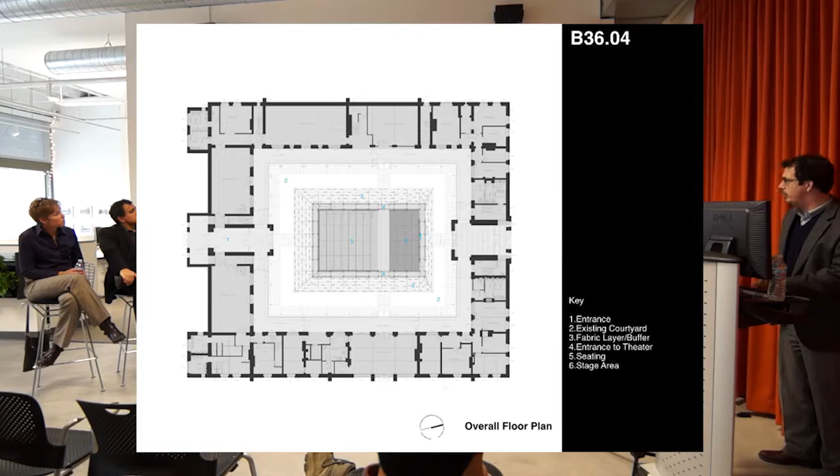We were given a design competition with a very tight, small courtyard. It's historic, very old, used to be a stable for the castle next door, so you can kind of see the plan. This is the building, obviously, and this is the courtyard is what we're dealing with.

Originally, we thought about the courtyard and how we could create interesting objects, but then quickly we realized that we just don't have any space. So very quickly we realized that the real problem is to create a somewhat tolerable transition between the existing building, the structure, and the theater itself.

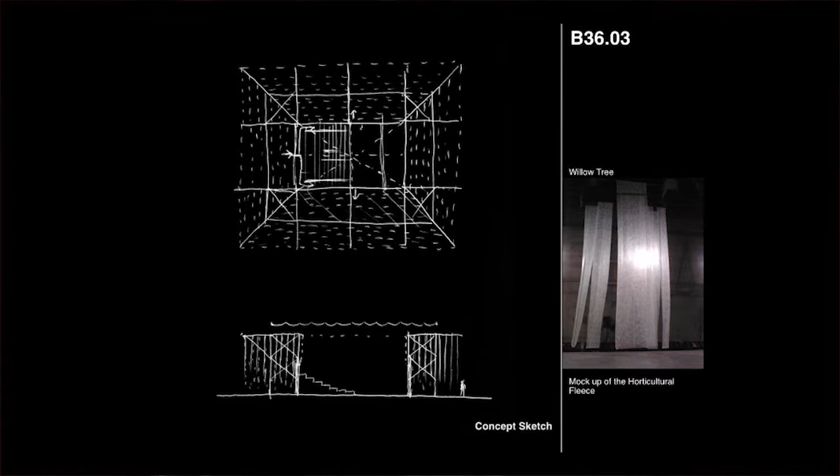So that's really a very simple diagram. If you go back to the sketch, you'll see this one, which is really what started the whole idea of having this kind of very soft transition from the courtyard into the theater, to create a very interesting transition.

The horticultural fleece is funny because one of the collaborators on this project, a professor in the theater department at Ohio State, had used that fabric on a stage set design. He wanted to use it as a recyclable material, one that's incredibly light, incredibly inexpensive, and you can do a lot of things with it. So we just took it and ran with it. It's almost like a happy coincidence that the things kind of appear to be what they look like.

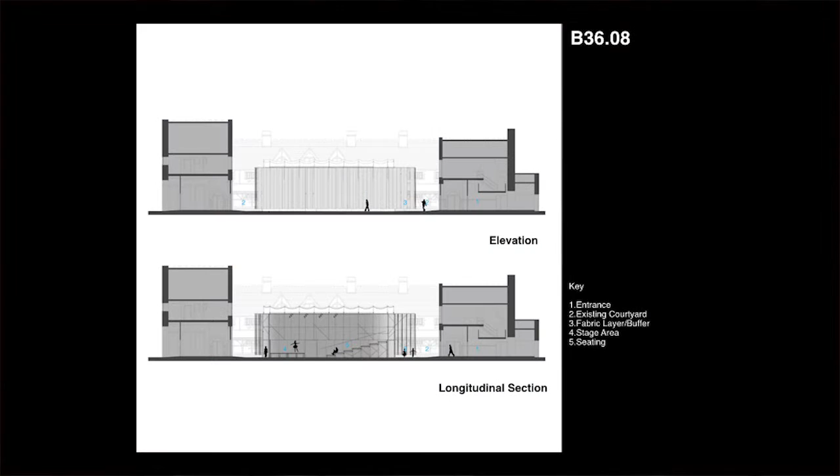So I guess I'm running out of time. You actually have 1 more minute.

One of the surprises of this project is really how much movement those fabrics create. When I was there, the whole thing felt almost like this underwater movement. Originally I thought it was very subtle, so we called it the willow theater, but in reality it's more like a jellyfish—the way the fabric moved in the wind. It took us about 2 hours just to unwrap everything before we photographed the structure. It was taking forever. So that was the surprise with that material.

Very good. I'd like to move down the line to Joe with the Battelle Darby Creek project. I'm going to advance the slides so we can get those coordinated.

The Battelle Darby Creek Nature Center was really the hub of a 7,000 acre Metro Park that Metro Parks has been continuously acquiring and trying to restore as prairie, but it lacked a center of activity for the school groups and other visitors coming in every day. We had this absolutely beautiful site to work with—restored prairie on what used to be farmland, now being turned back into the prairie ecology that had been there before.

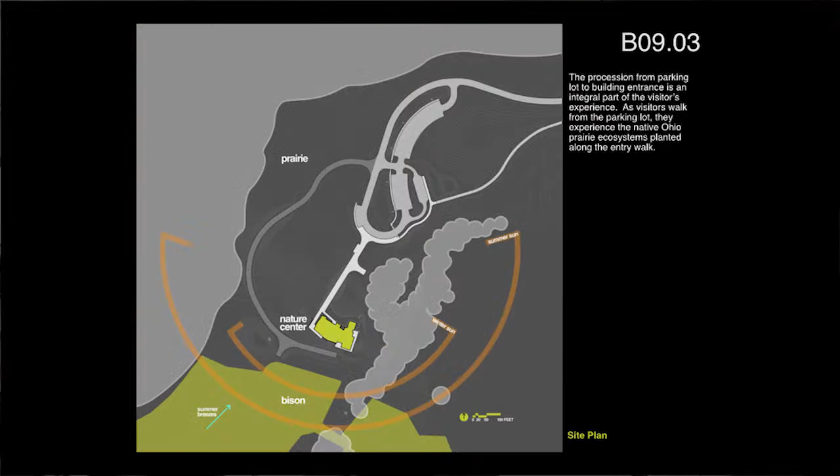A really crucial thing with this project was wanting to bring people into that prairie landscape first, having their impression of the site be dominated by the prairie before they ever reached the building. That led to creating a very long procession from the parking to the building, framing the landscape at the end of that procession rather than ending at a monumental front door. So there's a monumental frame and a monumental porch, but not a monumental front door.

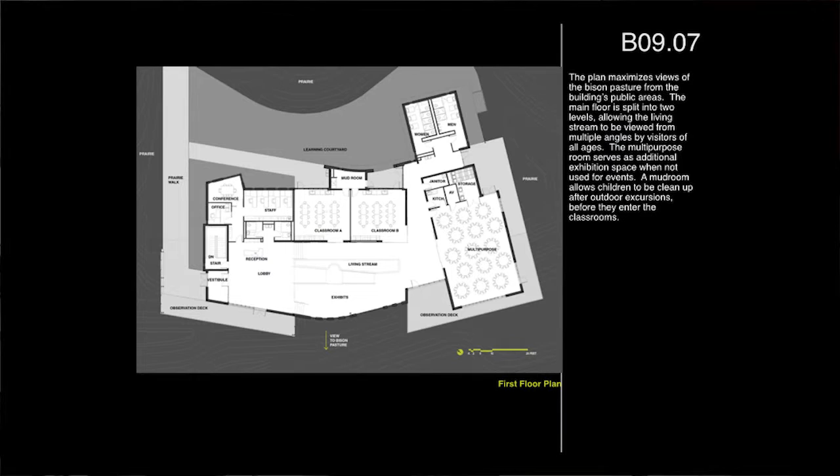The plan was generated through careful study of the topography, trying to balance lowering the building enough that as you approach it disappears, but keeping it high enough that you still get the nice view on the south side, and also keeping it out of the very strict boundaries that are part of the Darby Watershed Accord—really strict setbacks for the creeks around there.

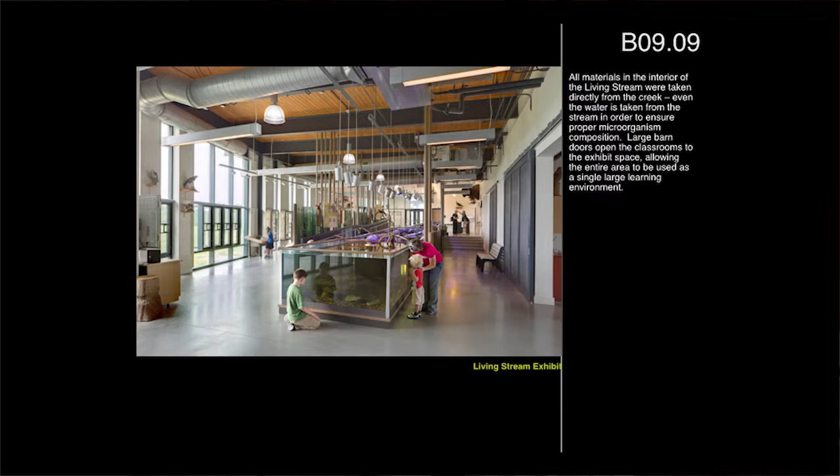Inside, there are a lot of exhibition spaces. This is the primary exhibition space, next to what's called the Living Stream—it mimics the riparian habitat in Darby Creek itself. Everything in the stream was brought from the creek, including the water. There's a pump that can bring new creek water up because it has the right biology for the organisms inside.

The material palette was inspired by the vernacular in the area—the barns and that kind of thing. We didn't want the building to look like a barn at all, but the corrugated siding and the wood roof deck were taken from that local imagery.

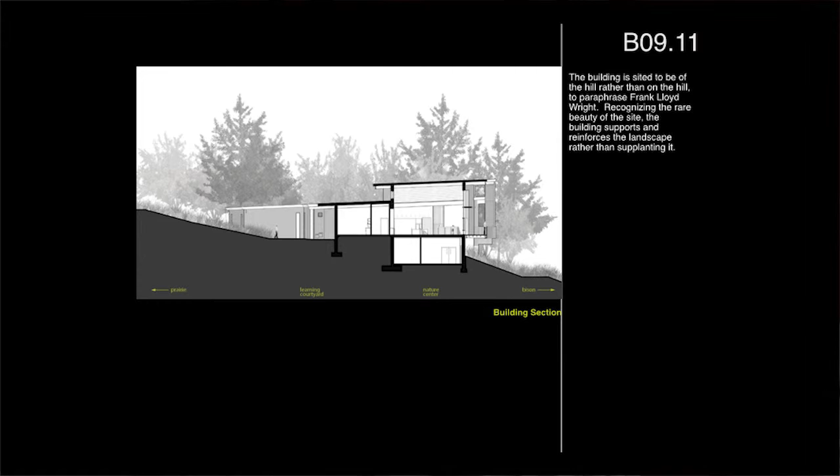This section through the hill was part of the inspiration for the whole project—the building coming out of the hill, being of the hill rather than perched on top of it. The next photo shows what we wanted to achieve, pushing it over the edge of the hill a bit more to get that effect.

You don't really understand the true size of the building until you get around to the south side, especially if you go one more slide.

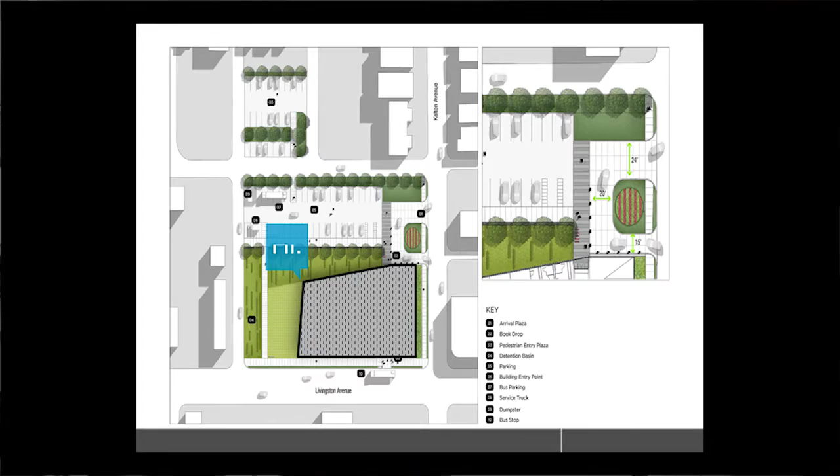The site strategy was pretty simple in terms of siting it. It's technical, but we were in an urban commercial overlay, so the buildings had to be pushed toward the street with parking at the rear. We wanted to capitalize on the corner of Livingston and Kelton for prominence and visibility. So, next slide.

There's also a story about what libraries are doing right now. A lot of people, at the outset of the project, asked whether there's a need for books anymore and what libraries do in the community. I think what we tried to understand is what libraries traditionally represented — this place where you went to get knowledge. What we're realizing now is that libraries are a lot more than just a place to get resources; it's really a place for social exchange.

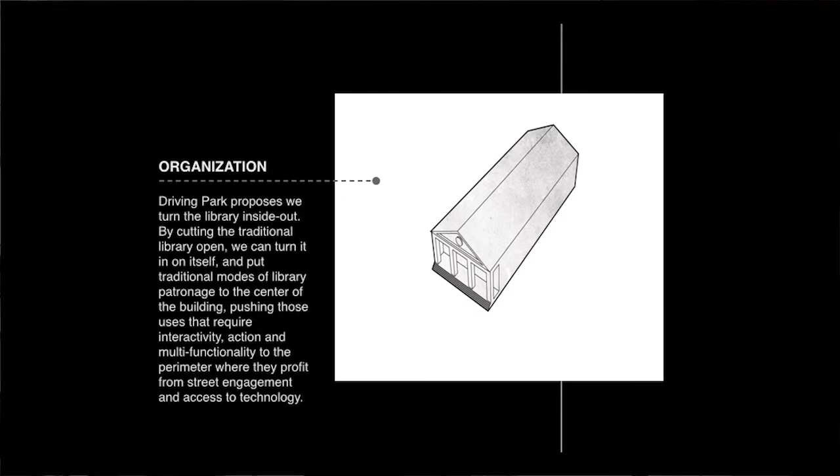How that compares to a traditional library was really important to the way we thought about the project. So we started to understand how the library could be split, turned inside out — a simple idea, but taking one of their key components, flexibility, and figuring out how the library wants to change over time, and how to make that evident in the building.

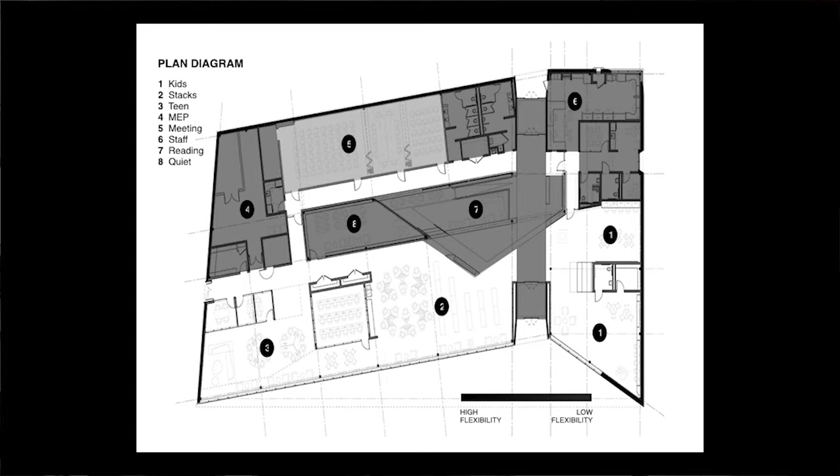We took all the stuff that's typically at the center and put it toward the outside, where it benefited from natural light and exposure to the street and interaction with the outside. As this laid out, the stuff toward the south — north is up — is the more flexible, highly active space, and the stuff to the north is the more utilitarian staff space, which is highly structured. This diagram illustrates that.

We wanted the outside of the project to express a posture reflecting the progressive nature of libraries and how it speaks to its environment. We wanted to use a material palette that was somewhat raw — everything's on a budget, so how does the exterior respond differently, using materials that come together in a different way? We set out the glass, wrapped it in what's traditionally decking material, and created apertures throughout the building with framed views, for entry or for specific moments in the project.

The interior is based on, for those that don't know, Driving Park, actually named after an actual racetrack that was built down the street a while ago. So this area was built around the racetrack, and we wanted to somehow pay homage to that in the interior of the building.

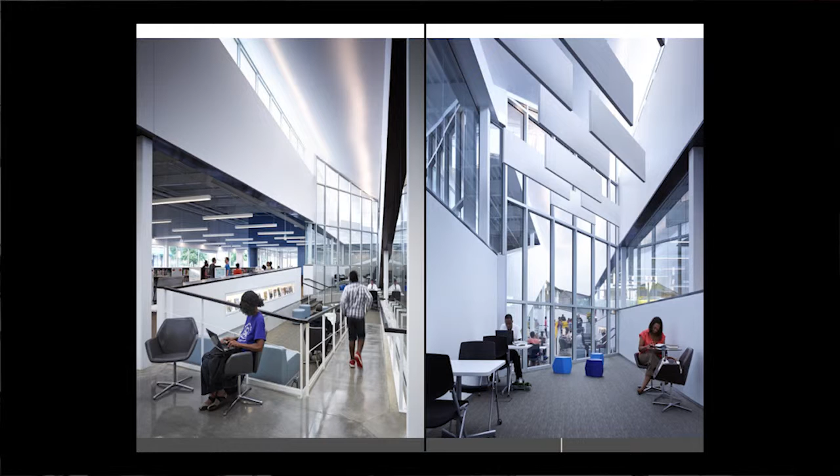So there's this organizational element on the inside that is called a racetrack, and we're using it in a way that helps to organize space, bring natural light into the building, and also house some of the media and assets of the library. So it has this kind of performative nature to it.

And so really all the spaces are built around kind of identifying these objects, that racetrack, and we're letting the furniture and the stuff that changes over time—we kept the palette neutral as far as interior materials go, and we have the furniture be the stuff that's easily changed. We let that be a little bit more vibrant.

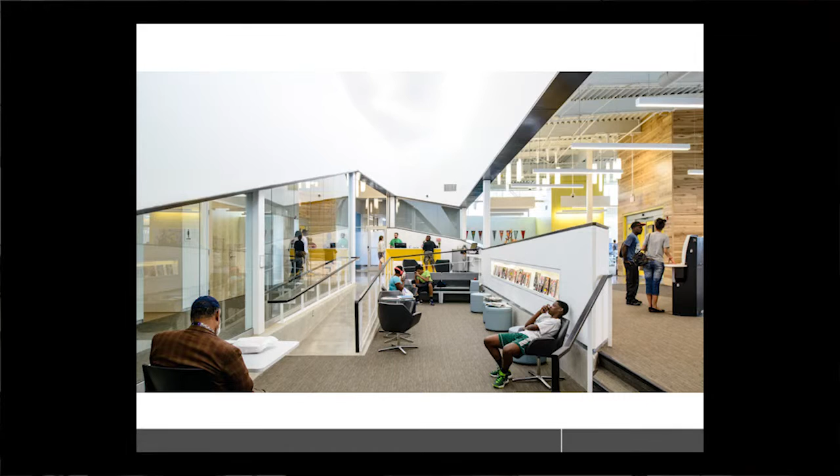Jack, if you could introduce your project, which is also a library for Kenton County.

Okay, let me go a few pages here. We'll get to this library. This is in Covington, Kentucky, which if you've ever been there, most of the urban fabric is still there, which is really nice in this community. And the library—actually this existing library was built in the 70s, but it's in the center of the historic district.

You can kind of see the existing here. It's a building with really small slit windows.

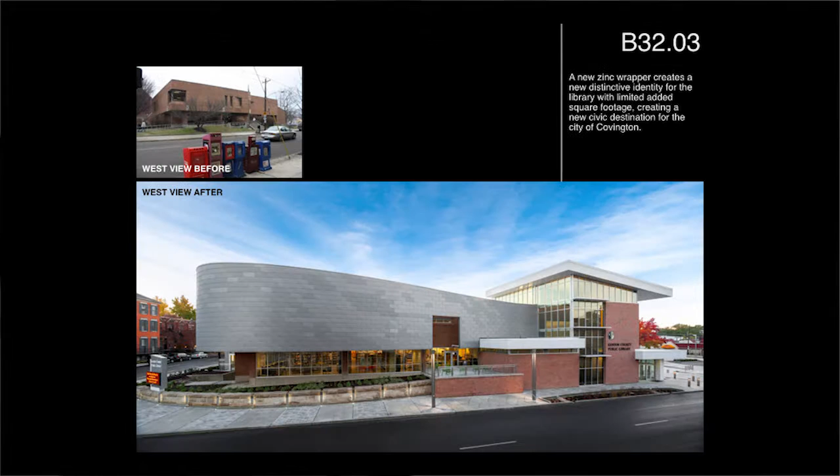The issue with that was the owner really wanted a project that became a destination in Covington. And on the same street, if you've ever been to Covington, right down the river, is the big Ascent, the big tower. So this is on the same street, about 3 blocks away, and they wanted something that would draw the attention to this building.

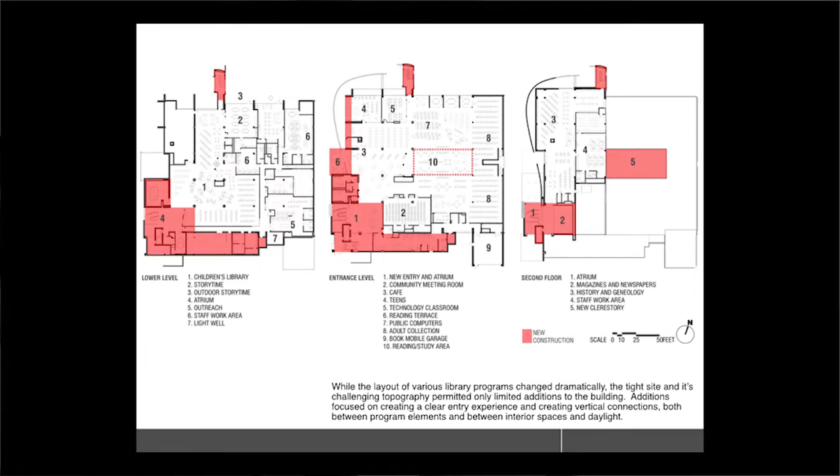So you can see kind of what was done here with the program—to take a 52,000 square foot building and make it 65,000 square feet. And what we did was, the idea was to wrap the building, change the function completely. We had to reorient the entrance to a different side of the building functionally. So the additions were placed really to meet the function of the library and to change the image completely for the library.

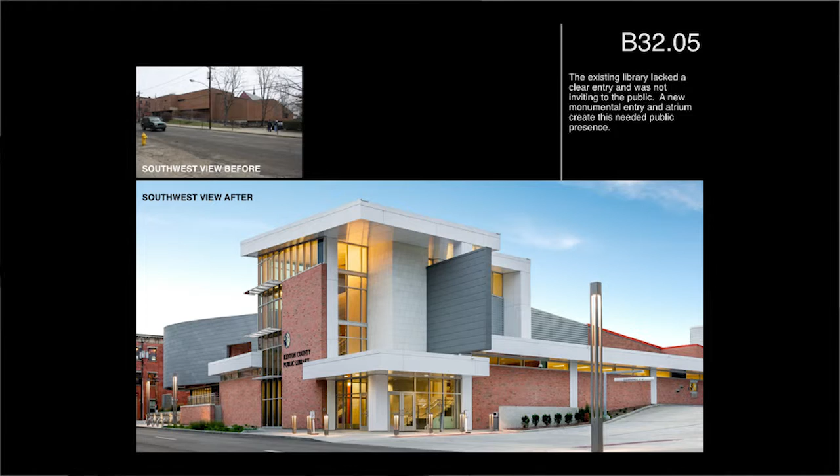Well, let me just explain too—the building was 3 stories, and we reoriented the building and created a new atrium space that actually organized those 3 levels.

With that, the idea with the screen here was, as you enter the site, you can only enter from one corner since it's 2 one-way streets, and this is the corner over here that you see. We reoriented the entrance to the other side, so we had to bring something to draw your eye down to the new entrance. So this screen here flows and draws your eye.

And this is a 3-story entrance. The other issue was that the main level was 7 feet above grade, and how the existing building had a big ramp and those kind of things—this new atrium solves that issue by coming in at a half level with an elevator that went up half a level to the main entrance.

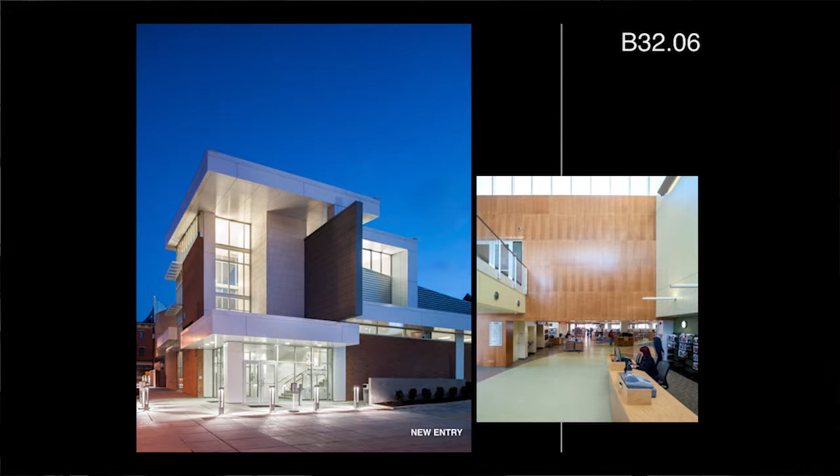The other issue, it seems a little strange, but a big driving factor with this function was it had to have a drive-up window for book pickup and return, and that has to be in the circulation workroom, which also has to have a relationship with the front door. You can see here it ramps up there, and we were able to put a ramp in that gets you right to that same spot. So functionally, all those functions came together.

As part of that, you can see the 3-story atrium that really links the levels. One of the other big issues with the building was creating outdoor space in this urban environment. Those images are at the end—yeah, okay, well they stay there.

The other issue was that we needed to bring light into this building, and we took one of the center bays and just popped it up to give—we made sure it was south and north light for sustainability. So we used daylighting and screened the sun in the summertime from the south side, creating a daylit space which really opened up the building.

You can see the shelving was all on wheels. This did have a very big book collection we had to keep, so it can be changed around and moved around, all the shelving.

You see sectionally here how the new 3-story atrium linked all the levels, and then the clerestory that popped up in the middle.

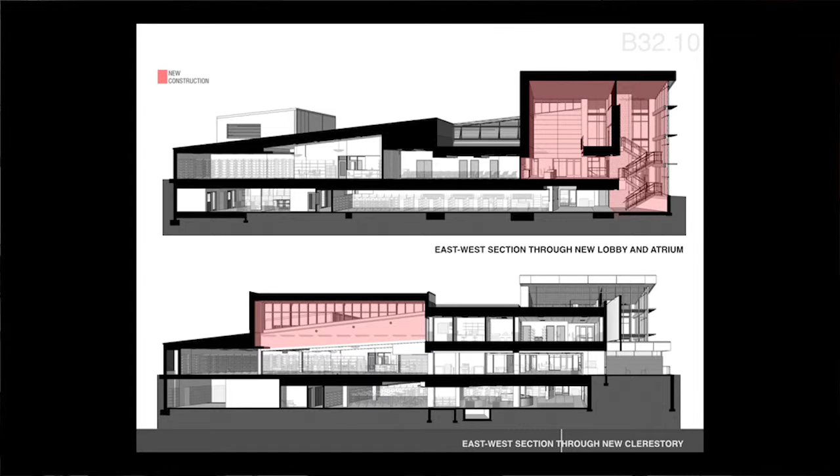But like I said, the other big issue was it's an urban library, but we needed outdoor space for story time for the children's area, which was put in a lower level. So we created a sunken court outdoors with a private area downtown, yet it was still an urban area and an outdoor space linked right to it. We had to do a new stairway, and that actually divided these two areas and created two smaller spaces that worked out for the story time room, but also for the staff outdoor area as well.

Well, moving on to Mike Longiorno to the Maloney Family Health and Wellness Center.

Thank you. Hello, everyone. So if I wish I was Rob Livesey right now because I would have brought a laser pointer with me. I don't, so I'm just going to point with my bottle or something. No, that's all right. It's right here, isn't it? Yeah.

So projects are interesting for a variety of reasons, whether it's the architecture or the program or the client, or all three. What ended up being a fairly simple building was actually, though, a fairly complex set of clients.

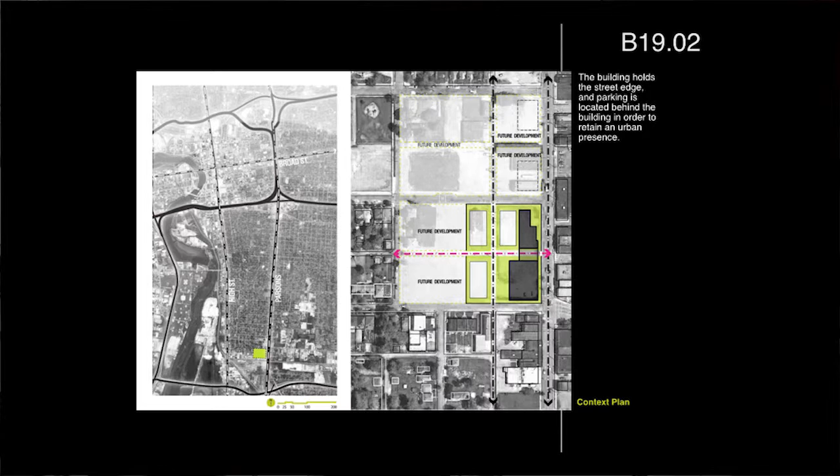The city of Columbus owns the building proper, but within the space itself is Columbus Public Health, and they're part of the city of Columbus Neighborhood Health Centers. They're sort of a separate entity from the city itself, but partly funded by it, and by the Ohio State University.

Columbus Neighborhood Health Centers has got a program for getting neighborhood health centers into struggling areas that they've been working on for a number of years. There's one on the east side, there's one that we worked on the west side, and then there's this one on South Parsons Avenue. A lot of people are confused about where this is, so if anyone's old enough to remember, it's where Schottenstein's used to be.

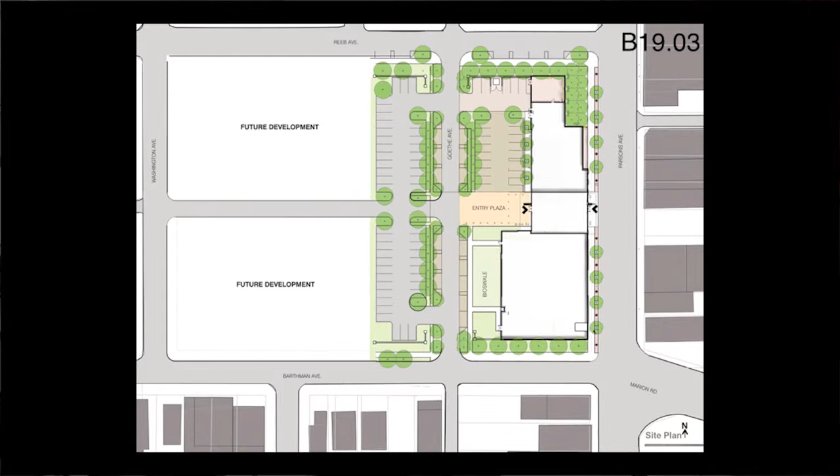That's kind of the site that it sits on right now, on South Parsons, just north of some of my favorite buildings in Columbus, which are the Buckeye Steel — I don't know if they call it Buckeye Steel anymore, it's Columbus Steel Castings — some fantastic buildings that partly influenced some of the way we thought about materials on the project. But strategically on the site, Columbus has got a strong alley system, a secondary alley system, and so the building partially relates to that.

And similar to Dryden Park, there's an urban commercial overlay. Some of the early struggles with the project, working with the client, was people wanted a 2-story building. We argued that you should have a 1-story building that responds in some scale way to the street condition, but is stretched to the entire length of the site to help occupy what was a really deficient streetscape. It was basically entirely blown out there.

There's a secondary north-south alley system called Goethe Alley, and we wanted to preserve that as part of the development. So our parking and our bioswales and a lot of our site stormwater retention is done using that.

That sort of registration of the alley system became a way to create a nodal kind of entry to the building that would have both a Parsons Avenue pedestrian, bike, and bus entrance, as well as a plaza from the rear that serves the parking lot itself.

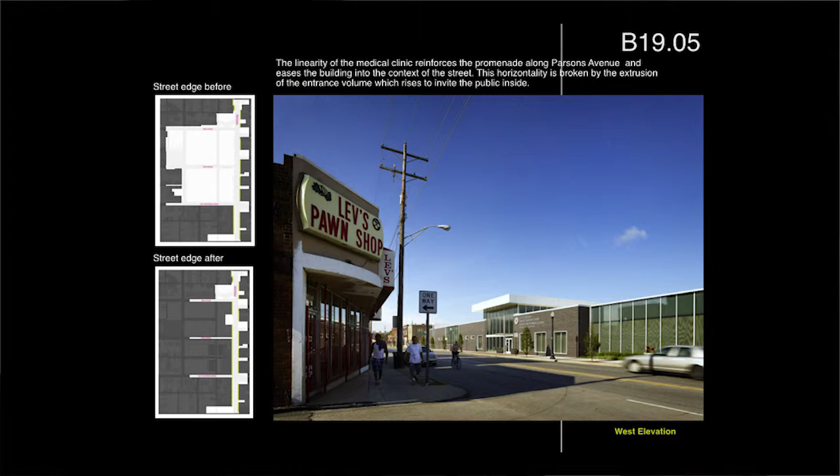This gives you an idea of how the building's situated on the site and how you can achieve a 1-story building by varying the heights of different components. Particularly that entryway became a kind of symbol, a significant way to identify where the entry was, as well as to create additional scale.

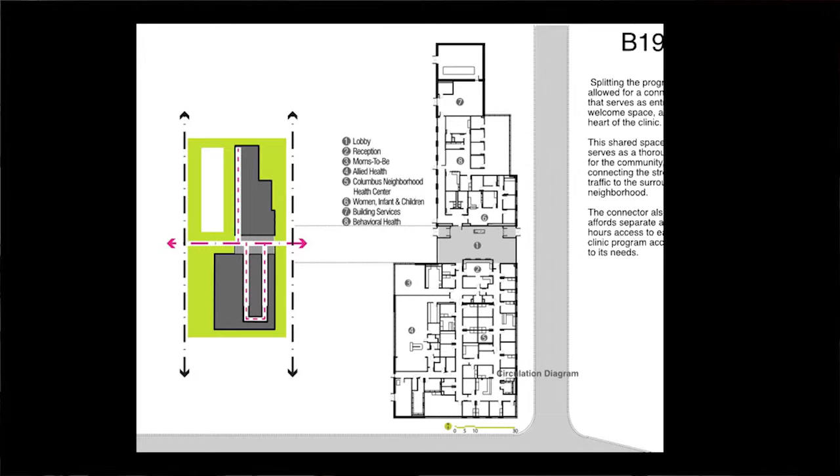And we had a mix of room types. We worked as hard as we could to get as many active spaces as possible on the perimeter, particularly on the Parsons Avenue perimeter. But the reality is in a health center, you're going to have a bunch of exam rooms. So there was a combination of some high windows and low windows, but we worked strategically to work those in.

That spine that's created in the center of the building - actually, the complexity in this building is that all these operators might operate at different hours, and so resolving security was really complicated, because OSU and CNHC occupied a similar footprint but had to have different accommodations after hours, as well as Columbus Public Health, which is in the northern end of the building.

So there's a sort of medical mall kind of concept, where over time the city says if they move out, we can sell that off or lease it out as retail space for other individual users. The building was designed to be really flexible into the future. It's a health center now, but it doesn't necessarily have to be one in the future.

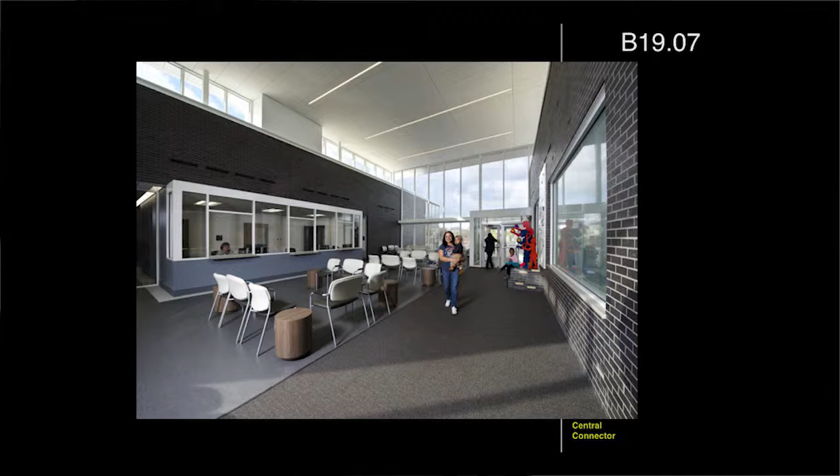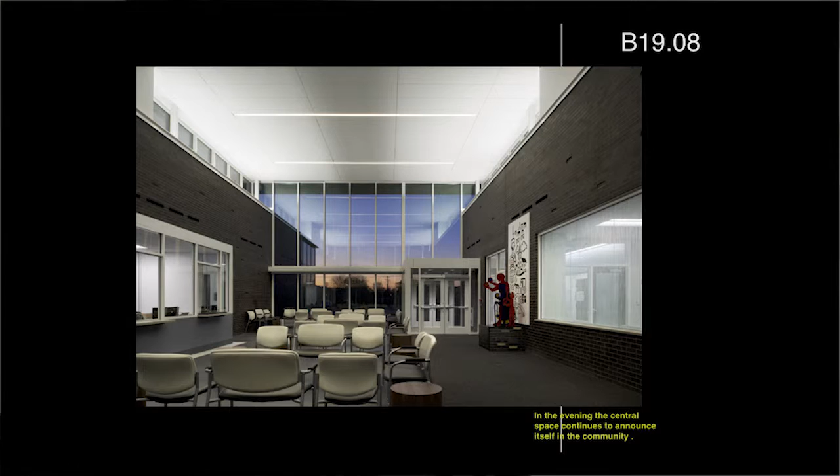So this is kind of coming in off of Parsons, looking out toward the west. To the left is registration. Next slide, a similar view later in the evening. Again, Michael referred earlier to framing views from within the building - that was really a critical consideration here, connectivity to the exterior. This is that sort of medical mall we referred to earlier. That's one of the corner offices, so you really do feel connected.

There's a different philosophy nowadays for how to build in struggling areas. You used to build fortresses. Now we're finding that you put more glass into buildings, and people are not suspicious of what's going on inside, so they end up taking care of it a little better. No one's throwing rocks at the windows, which was one of the pushbacks we got early on working with the community - there's too much glass, people are going to throw rocks through them. We've not seen any of that.

This is OSU's Mom to Be program. Basically it takes pregnant mothers who don't know how to cook or manage a home. There's a demonstration kitchen here and a lot of learning classrooms, but they've used this throughout the broader community as a resource space.

And just some interior views - we use a very simple palette. In terms of the exterior materials, this was a pretty contentious conversation early on in the project. The brick is dark, close to black, and it's pretty high contrast with the white.

And I like stories, so I'm going to tell you a story. When we first showed this to the mayor's staff - the mayor was really involved in this project - they said he's going to hate it, the building's too contemporary, the brick is scary. So we presented to him, and you know how Mayor Coleman is, he sat in his chair quiet the whole time, sat back, and said, 'This is some good damn architecture.' Then he said, 'I don't want any red brick on this, I want that black brick.' So it was a really great moment of pushing things a little bit to get what you really believe is the right thing to do, and worrying about the rest later.

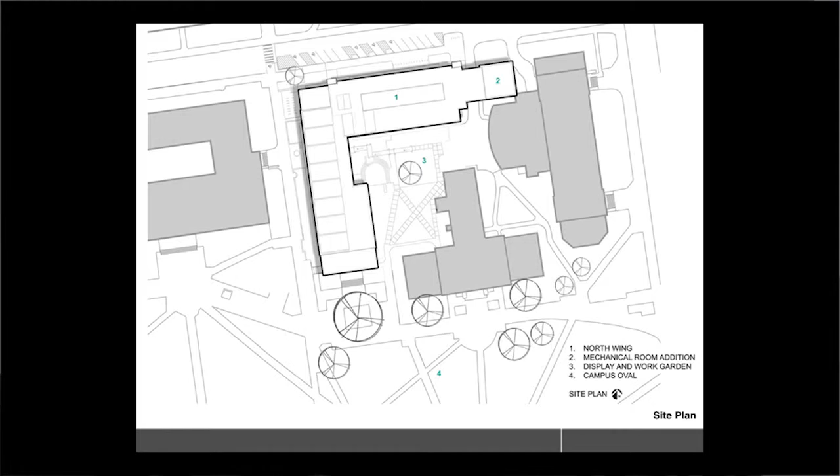The goals of the project, first from a very functional standpoint: we had to take the functions moving out of Haskett - being demoed - and fit them into a footprint offering about 20% less square footage. Then for the touchy-feely part of the project, the director of the program was really looking to elevate the image of the arts department. They were having difficulty competing with other schools for the highest functioning graduate students and faculty they wanted, just because their facilities were perceived as so deficient. So they really needed an image overhaul.

The moving of the functions from Haskett into Hopkins placed the center of the arts program right on the oval at OSU, surrounded by other arts function buildings.

So it was really an opportunity to make a center for arts education right here.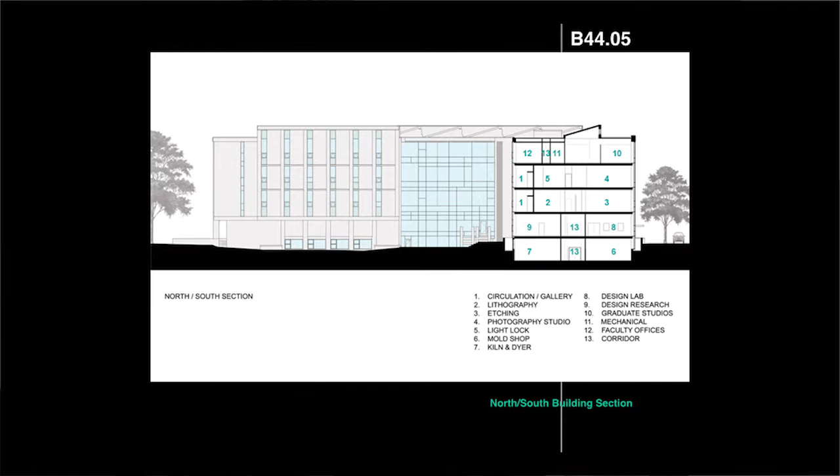We took the 2 largest programs moving over from Haskett, which was the photography and the printmaking studios, and put them into that space. I'm not sure if you made it all the way through to the double-loaded corridor photo, but the existing building was very institutional and was set up on a double-loaded corridor.

Keep going. There you go. So that's what it looked like. And so we took those 2 floors and completely gutted them. We moved the studio space to the north end of that wing, so we get all that wonderful light coming in.

And then right here, this is the south face of that wing. We located circulation and a gallery used for crits and for display. One of our strategies for dealing with that reduction in square footage available to us was to double up on some of the functions of the space.

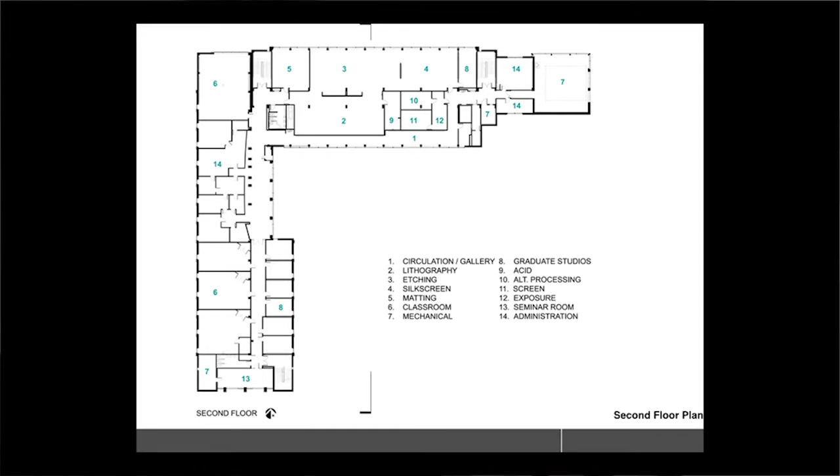So if you can go to a plan, I'm sorry, I can't say where it is. You can see how the studio spaces, here we go, numbers 2, 3, 4 up there. This is the printmaking studio up there, and we needed to keep the space as fluid as possible so that you could have in one area teaching going on, while in another spot that needs to use the same equipment, you could have studio space for the students to actually be working on projects.

So we worked through with the departments on how we could double up on some of those uses to achieve what they needed to in terms of their square footage restraints.

The most gratifying thing about the whole project, I'm really happy to report, is we did achieve the ultimate goal for the arts department. And I heard great stories about students and faculty that they had really tried to recruit prior to the renovation and had looked to other schools. Actually, several of them came back to OSU following this renovation because it offered better facilities than what they had seen before.

I'm sorry, one other thing. What I love also so much about this project is the way that the building communicates the function to the university and to the streets.

This faces a courtyard. The other elevation right outside those would, here we go, this is 17th. So as you're in these 2 major vantage points to view the building, you can really get a sense of what's going on inside, so that you can see that arts education looks very different from math or other sciences, and it's really a great advertisement for the program that they have there.